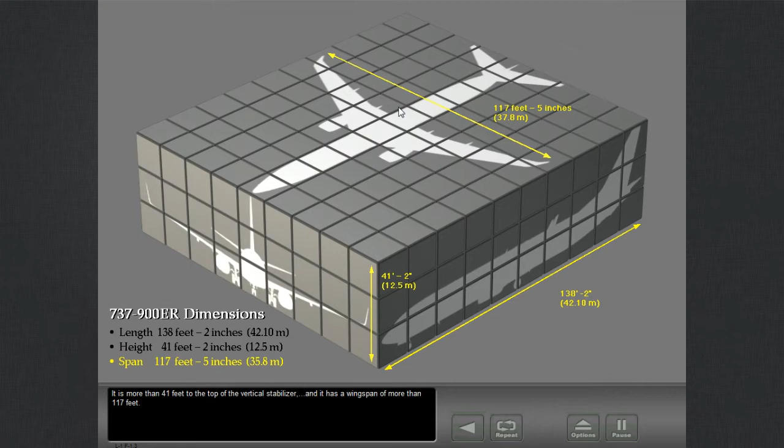The minimum width to turn the airplane is approximately 85 feet or 26 meters.

The weight limits for the 737 are different for each airline. There are limits for the maximum zero fuel weight, the maximum taxi weight, the maximum takeoff weight, and the maximum landing weight.

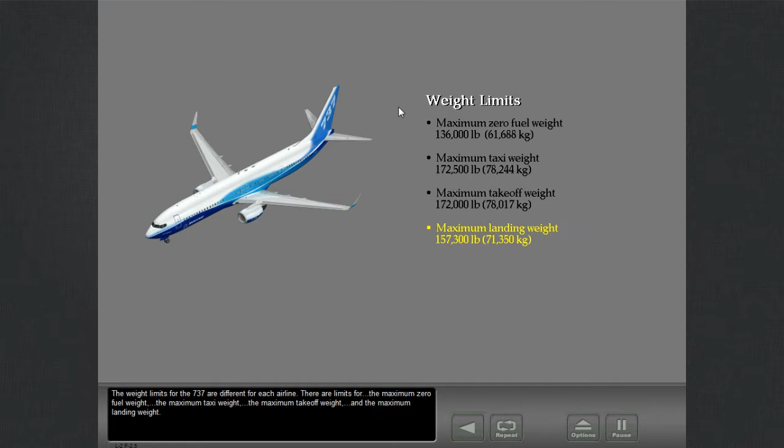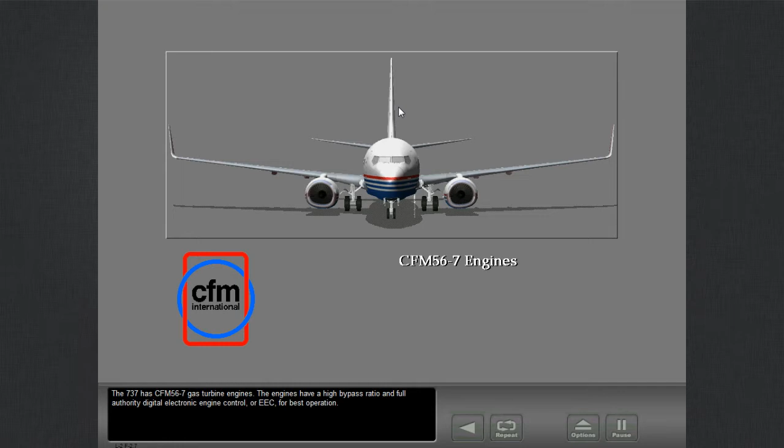The 737 has CFM56-7 gas turbine engines. The engines have a high bypass ratio and full authority digital electronic engine control, or EEC, for best operation.

The engines can be set to supply up to 27,000 pounds of thrust. Each engine has a 90 kVA generator. The generators power different buses and are not used in parallel operation.

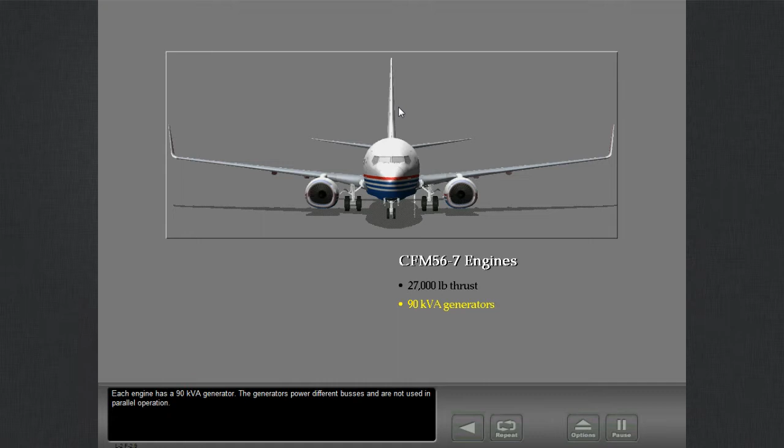The engine fan diameter is 61 inches. The engine nacelle has a flat bottom to give sufficient ground clearance.

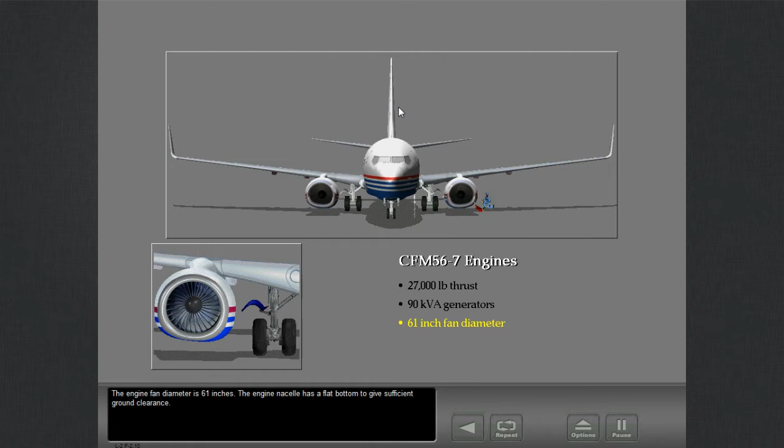The 737 can fly short to medium range flights. The maximum altitude is 41,000 feet. And the maximum operating speed is 0.82 Mach.

The 737 flight controls, normally operated by the hydraulic systems, control pitch, roll, and yaw.

The trailing edge flaps, the leading edge flaps, and the leading edge slats normally use the hydraulic systems to operate.

Manual operation called manual reversion is available for pitch control and roll control.

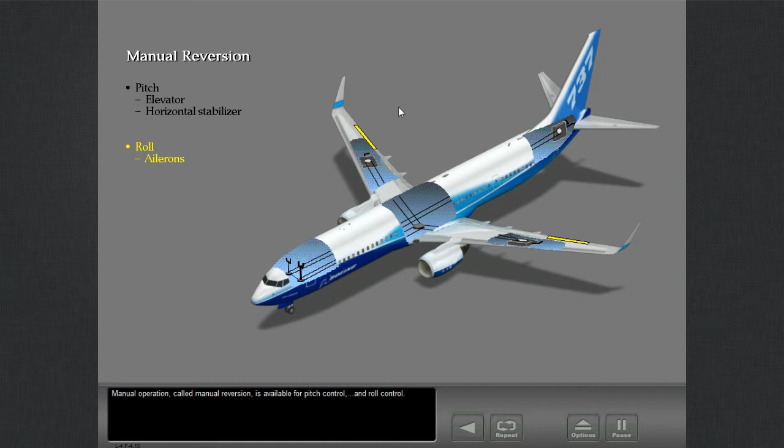There are 4 cabin entry doors, 2 on each side of the fuselage. There are 4 overwing and 2 mid-door emergency exits. All cabin entry doors are emergency exits also.

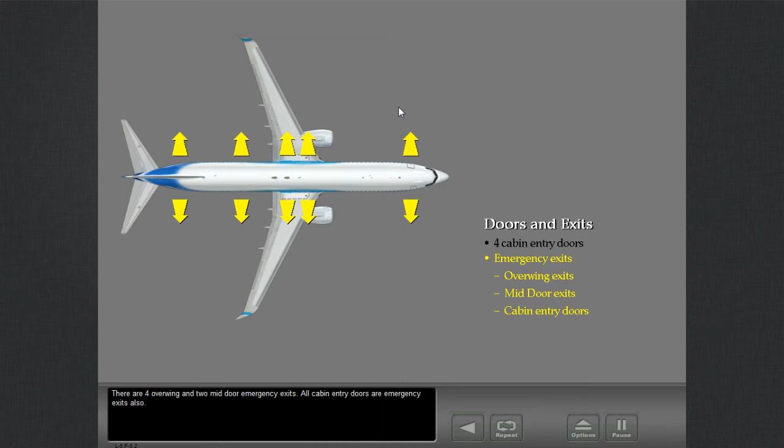There are 2 cargo doors, 1 forward and 1 aft.

There are special coatings on the pilot's windshields to help repel rain.

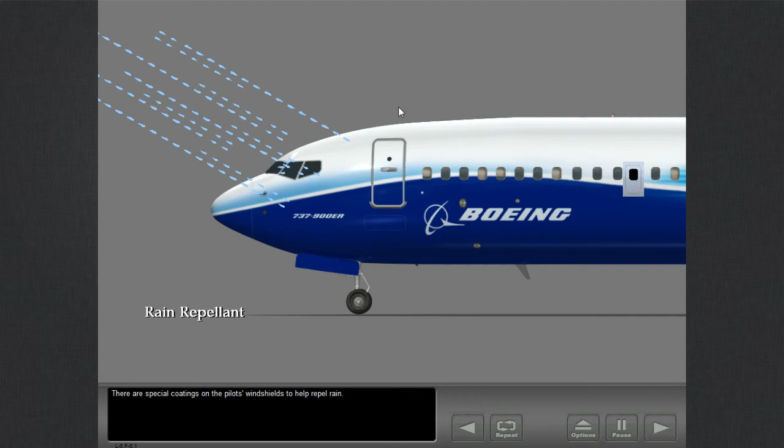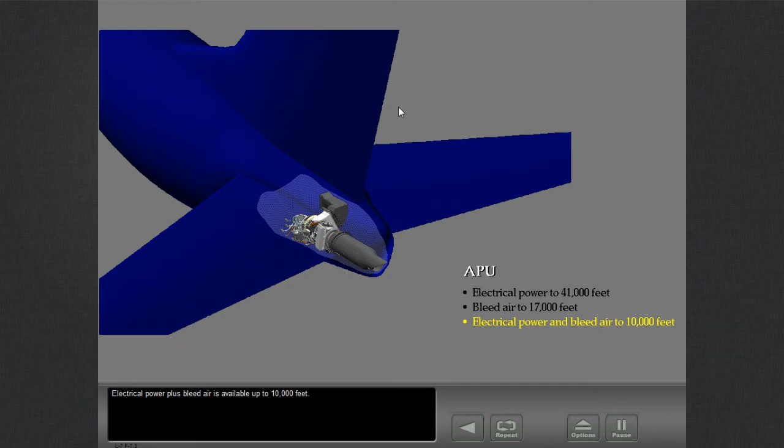An APU in the tail supplies electrical power on the ground and in flight at all altitudes. The APU also supplies bleed air on the ground and up to 17,000 feet. Electrical power plus bleed air is available up to 10,000 feet.

The fuel system has 3 tanks. One center tank, and 2 main wing tanks.

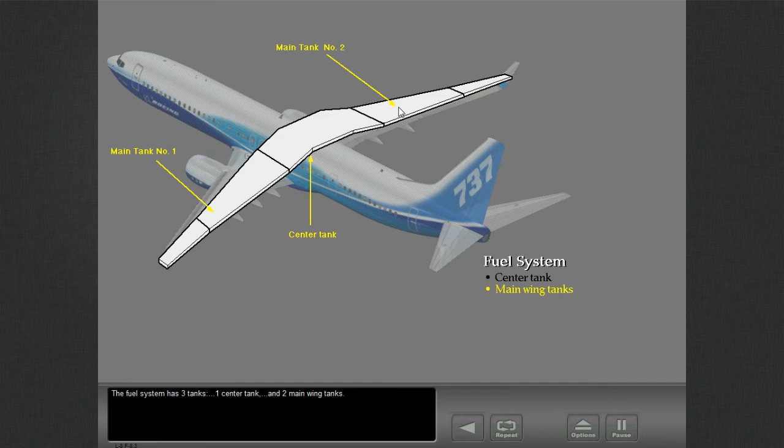The total fuel capacity is more than 46,000 pounds, or 20,500 kilograms.

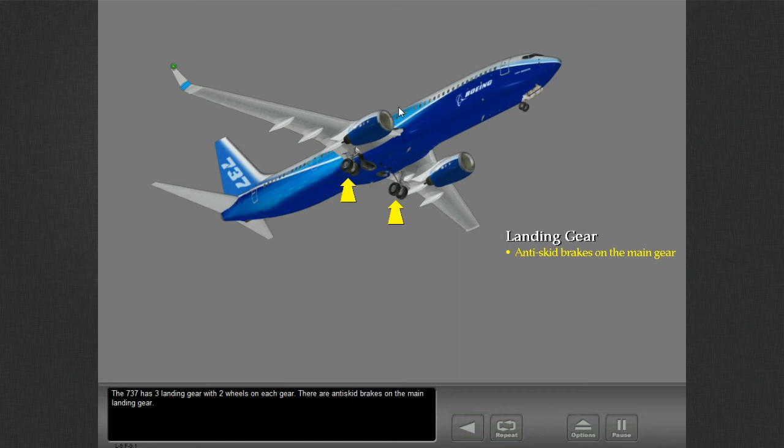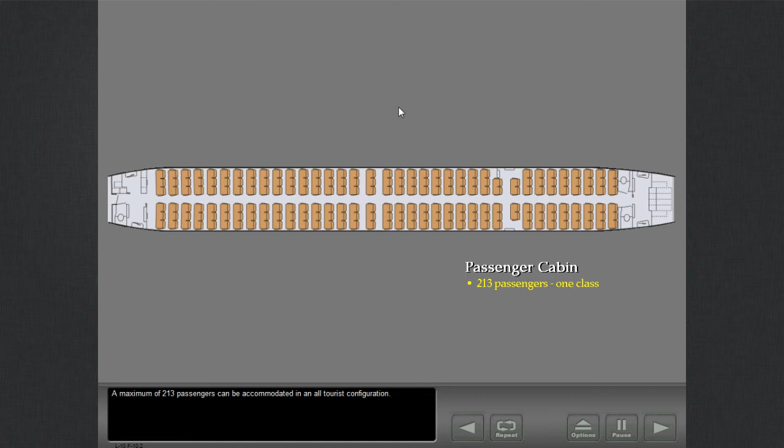The 737 passenger cabin can be configured to meet the needs of each airline. A maximum of 213 passengers can be accommodated in an all-tourist configuration. Vacuum lavatories can be installed in different cabin locations.

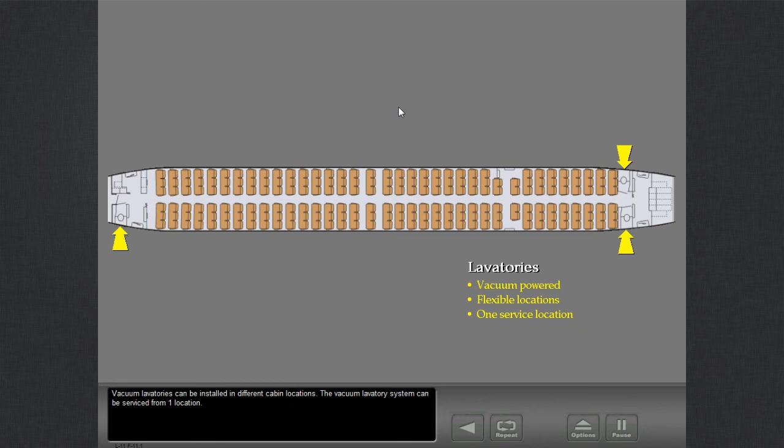The vacuum lavatory system can be serviced from one location. Galleys can also be put in different cabin locations.

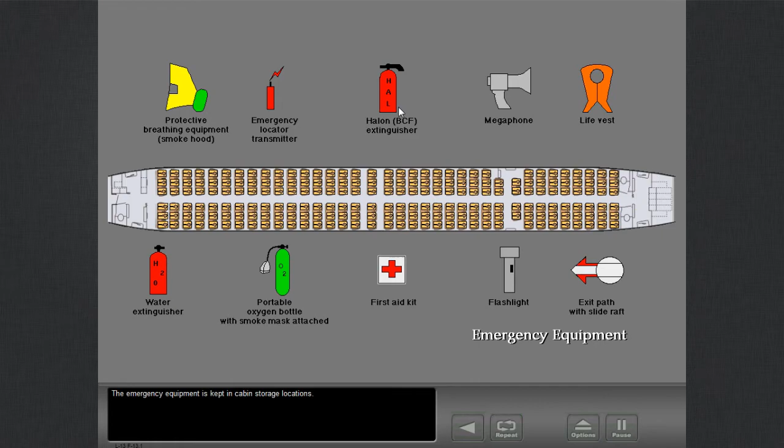The emergency equipment is kept in cabin storage locations. Each passenger and mid-door has an emergency slide.

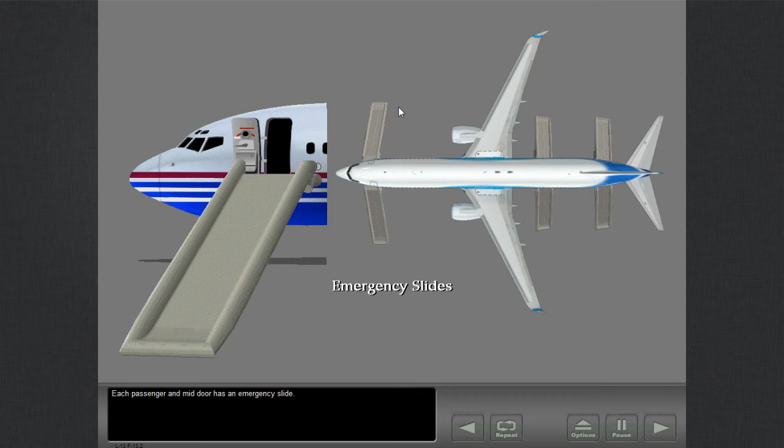As with other jet transports, the cockpit has the overhead panels, the glare shield, the instrument panels.

The center instrument panel, the forward electronic panel, the control stand, and the aft electronic panel.

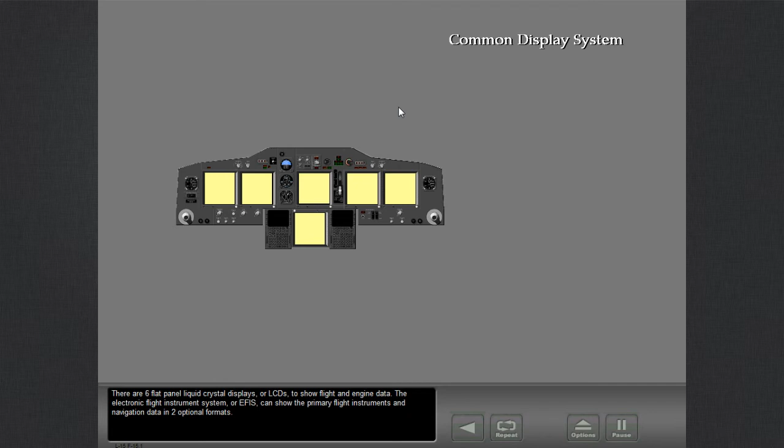There are 6 flat panel liquid crystal displays, or LCDs, to show flight and engine data. The Electronic Flight Instrument System, or EFIS, can show the primary flight instruments and navigation data in 2 optional formats.

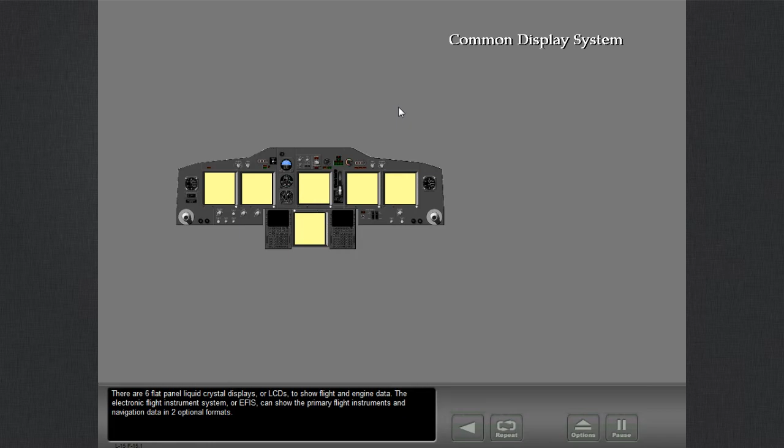The 737-900ER EFIS map format shows flight and navigation information in almost the same way as the 737-300.

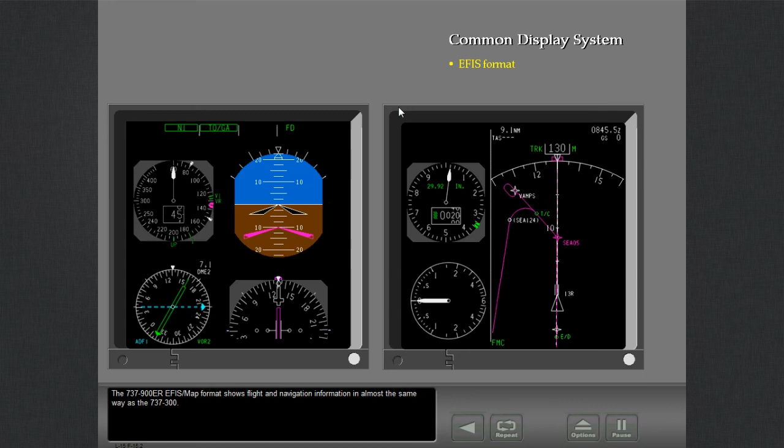The primary flight display navigation display, or PFD-ND format, is like the Boeing 747-400 and 777 flight displays.

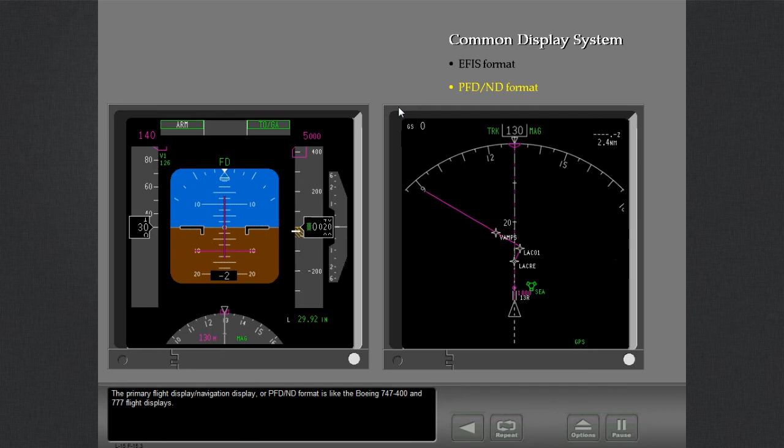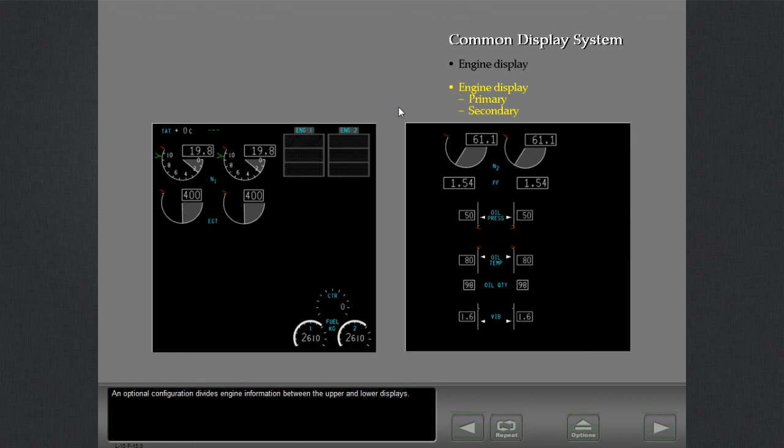The upper display shows engine indications and systems information. An optional configuration divides engine information between the upper and lower displays.

The radio communication system includes very high-frequency radios. There can also be high-frequency radios. The radio communication system can also include a data link system to send and receive data link messages.